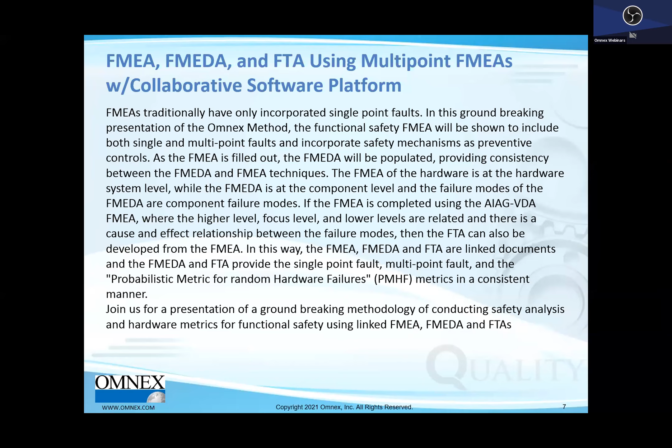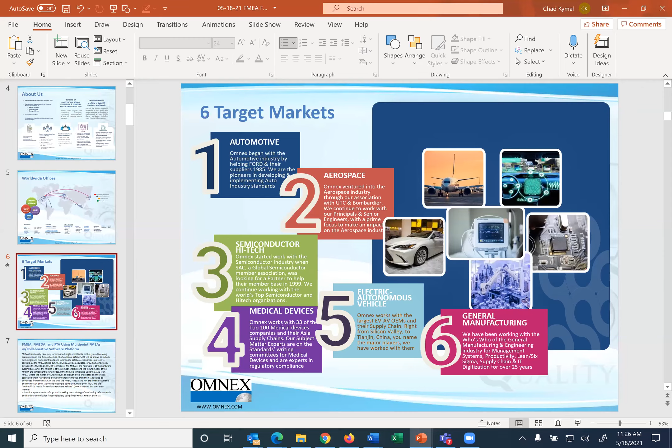If you can send me some sort of a link which is not forcing me to fill everything in, it would help a lot. All right, it's joined me finally. I'll join with video and I will turn it off, okay? Miles, do you want to try to share your slides, or you want me to run it? I think I'm in now. All right, folks. Hopefully I've not lost many of you and gave you all time to join in. Are you seeing my screen? Yes. All right. Folks, I typically don't sweat a lot when I do these webinars, but let's continue.

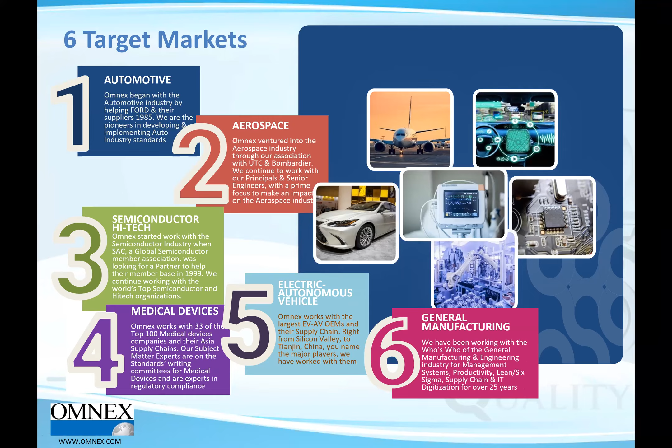So I was explaining how we are in 6 target markets, and you see here automotive. A couple of years ago, we realized the entire industry was going electric and then autonomous. Folks, if you don't know that now, you should know that now. I'm not going to explain all the reasons why, but definitely China deciding in 2035 and then GM deciding in 2035 they're going to be carbon neutral and completely electric is one of the big forces.

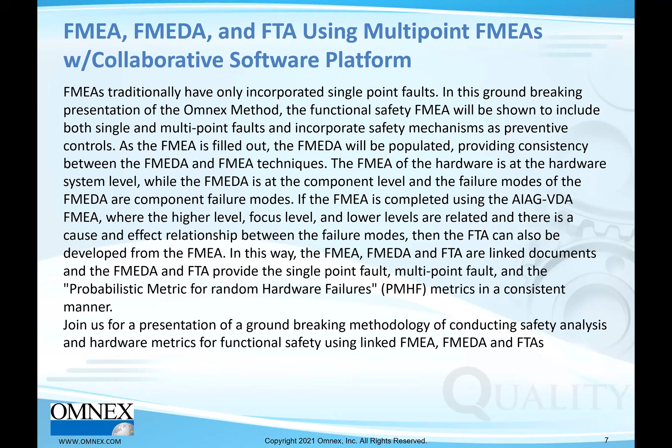With that said, just a little bit about me. I've been in the automotive industry, and we've now done a lot of work in semiconductors. I may have mentioned to you, I helped write the semiconductor supplement and I'm very involved in many different committees writing standards. With that, let's get to the agenda.

So here's what we're going to do. We'll talk about the 26262 safety analysis, because the 26262 functional safety analysis is what's driving this need for FMEDA and FTA. I'll explain that. Then talk about the DFMEA, the new DFMEA needed today, and how that helps in coming up with the FMEDA and the FTA. Then we'll talk about the linked FMEDA and linked FTA, and then we'll go to the summary.

Let's check here. All right. So first question, Miles, if you can ask the first question, I'd like to know why you're here so I can fine tune the delivery to help you, okay? This should be fairly easy to click. Let's not wait too long, Miles. We're going to do fine though.

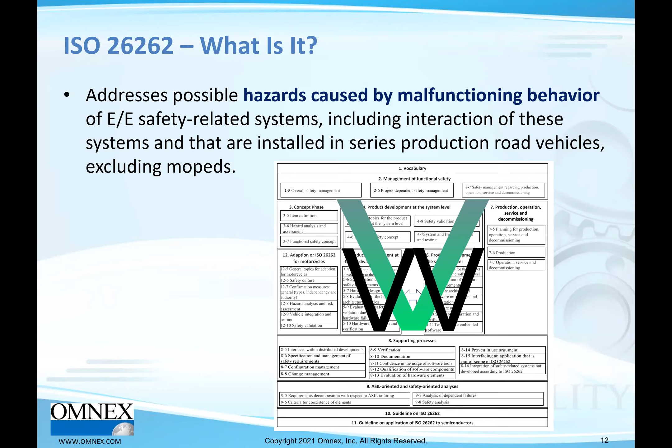So what can we say here? There's 12 parts actually. I think this is the latest one. So 12 parts, and you can see that the system level itself has a V running through hardware and software, and then small V's both for hardware and software. What's interesting to us is that the requirements between the system, hardware, and software are linked, okay? The standard calls it allocation.

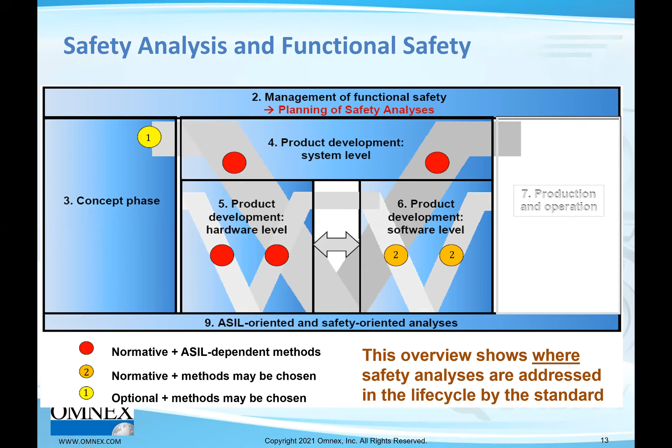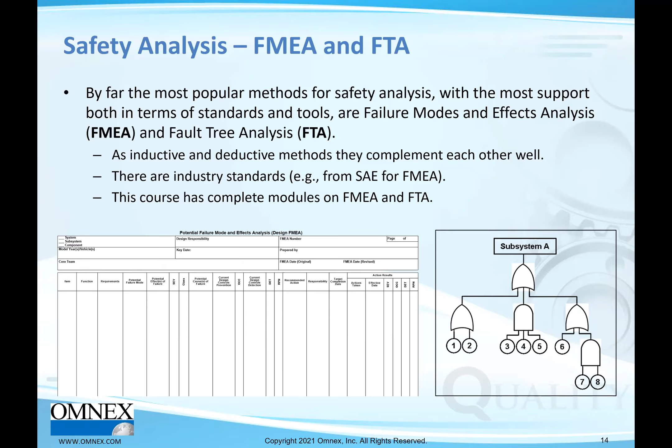But what's more interesting to us is that the safety analysis is being asked for in a couple of different places. At a system level, you need to do it at a product level, and they say both inductive and deductive, which is DFMEA and FTA. In the software area, they leave it up to you, but Omnex says, let's use a DFMEA, okay? So pretty much what's on the left-hand side is what we call the 4th edition DFMEA, and then we have the fault tree analysis here, and how do these two link together? That's the key question. That's the problem we have solved. But it's a little bit more than that. I'll tell you how we came upon this problem.

But before I go there, let me just say, not only do you have to do a DFMEA and the FTA, forget the software metrics right now, we also need to cover the hardware metrics, the 3 different hardware metrics.

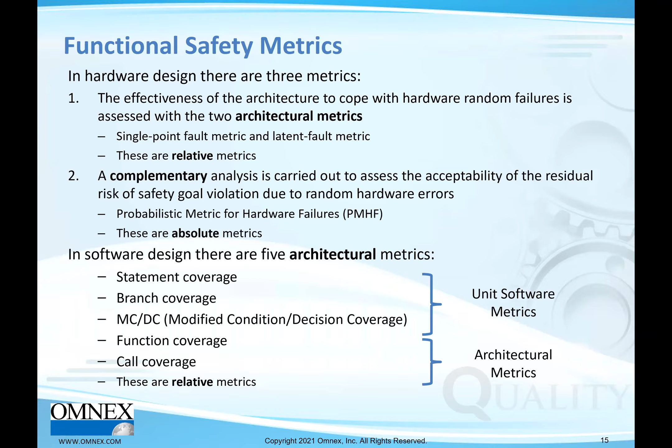One is called a single point fault, second is a multi-point fault, and then there's a probabilistic metric, the FIT rate, okay? Failure in time. So this is being calculated, and a lot of people use a FMEDA for it, okay? So a single point fault, a latent point fault, which is a multi-point fault, and probabilistic.

So here we are, been working in functional safety for the longest time, doing our assessments, and we find out that the DFMEA and fault tree analysis just don't correlate. And then we see the FMEDA, a third one that doesn't correlate. In fact, the FMEDA and the FTA need to be coming up with the same answers because both of them solve the single point fault, multi-point fault metric, and they're giving different answers. And so we asked the question, why?

And the answer was really that the DFMEAs we have today are only single point fault, which is a single cause. When you look at the failure, it is by a single cause. And what multi-point fault means is it's caused by A and B. A cannot cause it by itself and B cannot cause it by itself. When A and B come together, this failure happens. So that's the difference. That's why the DFMEA and the FMEDA and the FTA don't relate to each other.

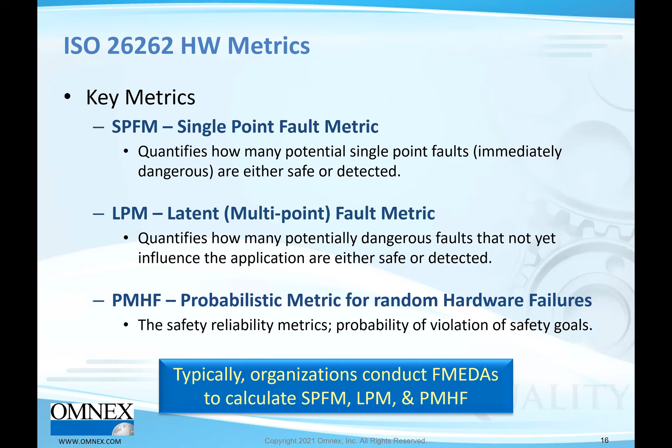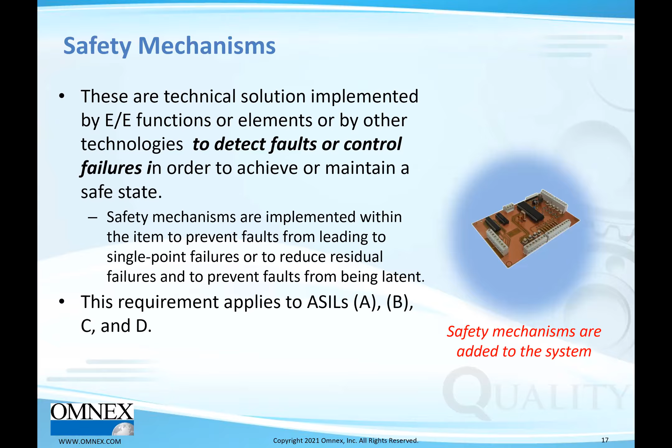So what we did at Omnex, maybe 2.5 years ago, our group, I mentioned that we had 3 of the writers of the core tools. We put our heads together and we asked the question what to do, and we created from there a DFMEA which is both single point fault and multi-point fault. I'll explain a little bit more. One of the things we also had to bring in was this idea of safety mechanisms. Safety mechanisms detect faults or control failures, nothing more than preventive techniques. And so we brought in the safety mechanisms into the multi-point fault.

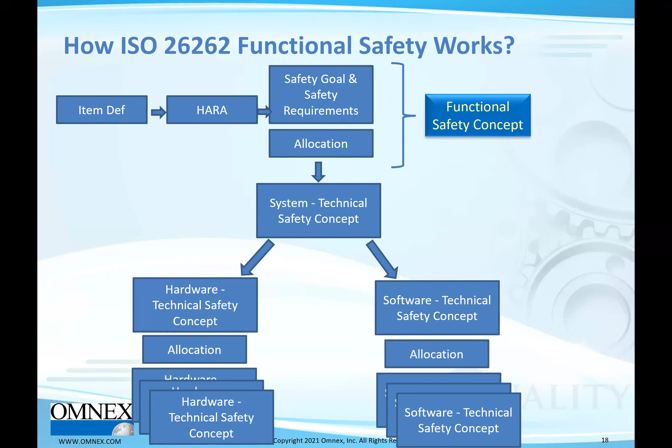So here's the flow. Here's the HARA. The HARA is nothing but the function's malfunction, okay? The safety goal is just a statement of this malfunction, and the safety goal populates the DFMEA. From there, the safety goal is allocated into the technical safety concept, which is system requirements, and then it's broken down into hardware requirements and software requirements. And hence, we call this a flow down at Omnex. Now, of course, this is also called structure in the AIAG-VDA DFMEA. But as you all know, the BOM or the structure, you could have a system, a subsystem, and even at a battery pack, it's more complicated. In fact, I have an example, so let me wait.

So let's move on. Let me ask you this question also. Do you work in the functional safety area? Yes or no? If no, do you work with one of the tools in this webinar? I just want to know how many people we have that deal with functional safety.

I feel like showing myself. I'll turn it off because I'm afraid it's more interesting. So you can see here, I don't usually sweat, but the little bit of lateness caused a little anxiety.

Okay, about a 50-50. Interesting. For the folks who said no, about half of you work with DFMEA. So 27%. About 80% of those who said no, so about 40% of the audience is working with these tools and interested in these tools.

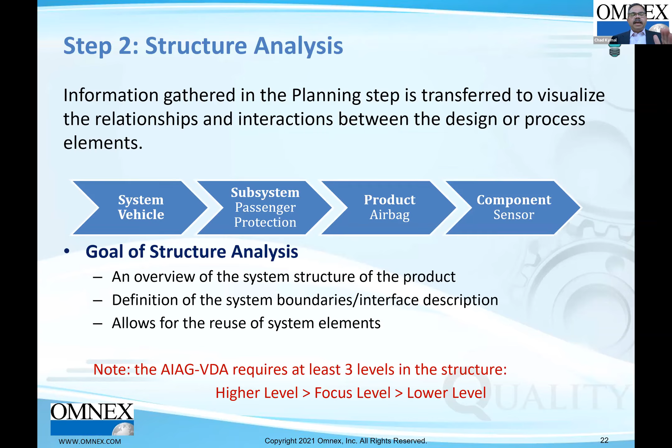So here is the idea of the structure. Well, this doesn't fully explain it. I have an example for a battery management system so you understand what the structure is. You've got to do the structure first. If you follow the Omnex method, you've got to follow the structure, and then you have to flow down functions and requirements like this. Here's the battery pack breaking down into 4 modules that break down further, and the BMS breaks down. So we're going to focus on the BMS. In my examples, and I'm going to show you some examples, it breaks into BMS hardware and BMS software, and the BMS hardware breaks down into the relay, fuse, et cetera, all right? So software is also important.

We'll flow down. Once you have the structure, you need to flow down. I don't have a picture of the functions and requirements. Yes, I do. This is just saying that, hey, you need to have traceability. And you're actually looking at our software, which has traceability up and down. Well, so I did not have the flow down. I'll actually show you a video that shows the flow down. Just keep in mind, you're looking at this structure and you're looking at the requirements as they flow down, all right?

The video seems to be working fine, I think. I'm going to continue with that. You can provide comments. I really appreciate all of you who gave me feedback when the system was not working well. I think you're able to keep up, and the internet is working fine right now, so I'll keep it on, all right? So here we have the structure.

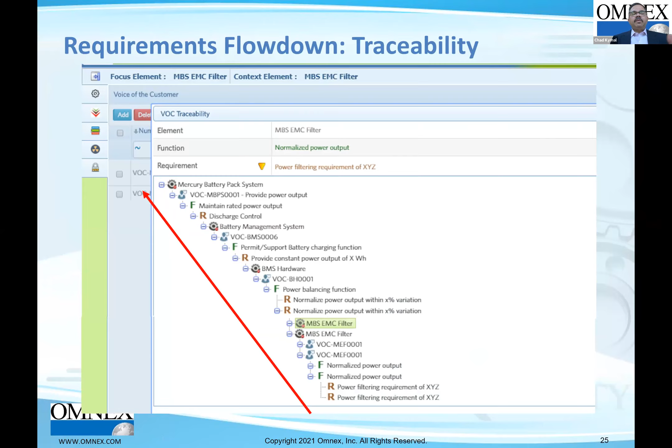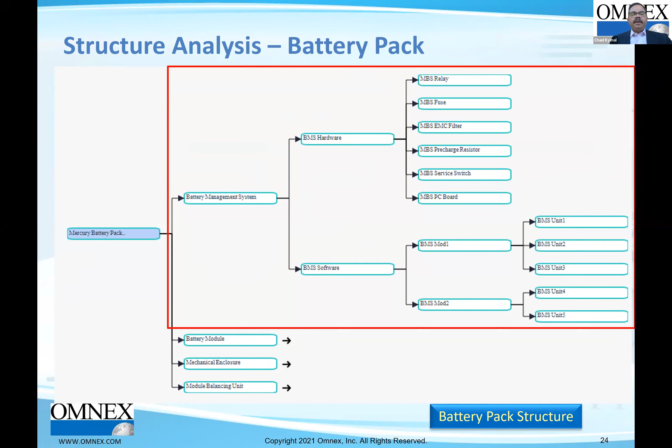By the way, this backwards and forwards traceability is very important, not only in ISO 26262, but for ASPICE for all the requirements. So when you go to ASPICE, it's not just for safety functions and requirements, it's for all functions and requirements. So when I talk about the multi-point FMEA, it's for all the requirements that were flowing down. As soon as you do the structure and the flow down, your DFMEA is automatically populated, okay? The left-hand side of your DFMEA is filled out.

And let me just... somebody says, oh, it keeps interrupting? Okay, I will turn this off. Thank you for letting me know.

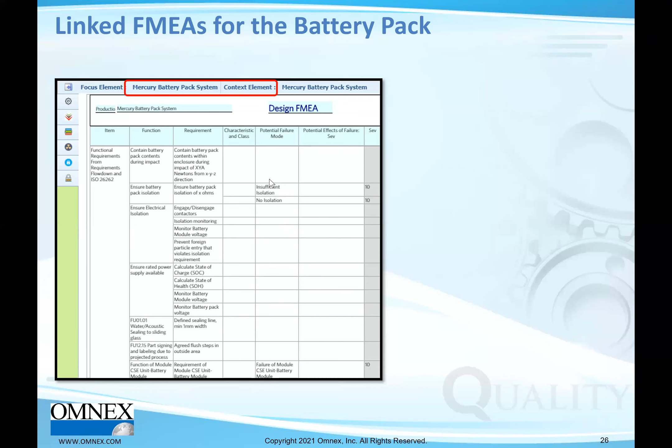So we have the DFMEA, and not only the system, the battery management system, all the modules, by the way, the subsystems fill in, but we're focusing on the BMS. For all of them, the left-hand side of the DFMEA is completed. Now you might be saying, what about AIAG-VDA? It's the same for the AIAG-VDA DFMEA, but I have more to say.

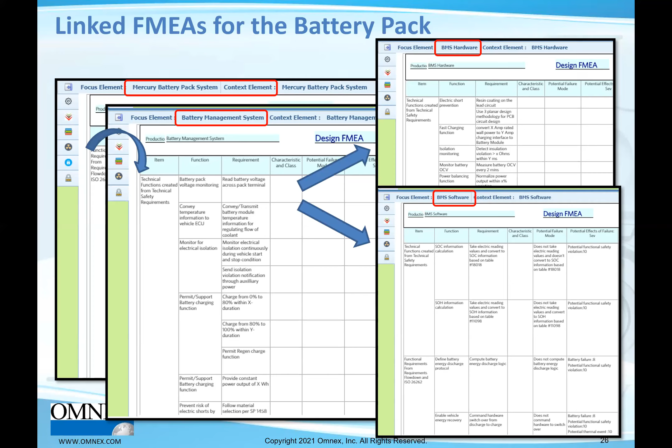Hold on. So when you're done with this linkage, you have a flow down from the safety goal into the DFMEA with both single and multi-point faults, and then going into the FTA, and this is supposed to be FMEDA, all right? I keep editing this to put the FMEDA on top. Oops, maybe not there. Here, FMEDA is here. So the DFMEA, the FTA, and the FMEDA are linked, and I'm going to explain that to you in the next chapter. Are we on time? We're doing okay on time.

So first, though, we need to have multi-point faults and single point faults, all right? And you need to have the safety mechanism. So once you put all that into the DFMEA, it needs to go into the FMEDA and the FTA. Once you populate the DFMEA, you get almost everything else.

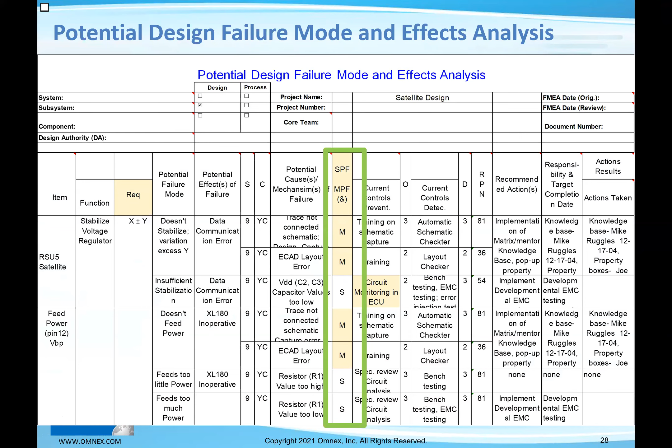Well, not quite, but almost, okay? So what do you need to do? Number one, create the structure, create the flow down of functions and requirements. That's called function analysis. Again, function analysis in the AIAG-VDA is between two items. What we do is we do the flow down between the entire structure, okay? Otherwise, you're not going to get the fault tree analysis.

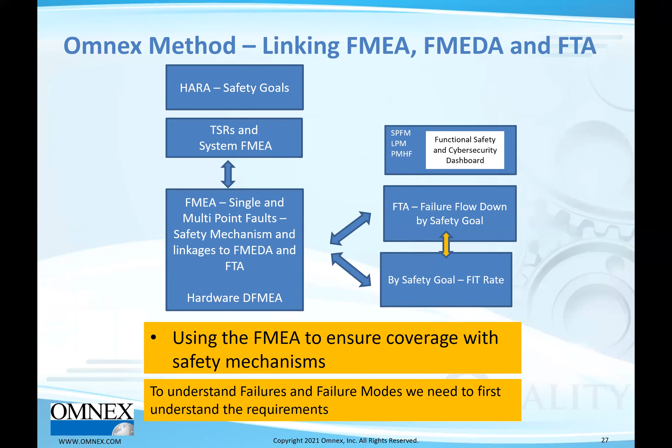And it incorporates single and multi-point faults, special characteristics, ASILs, incorporates safety mechanisms, and with the right dashboard, it provides you a chance to see. So what we mean by that, let me go back here. If you have a dashboard and it tells you what is your single point fault, latent point fault, and probabilistic metrics, you can go back and start playing with, what if I put a safety mechanism here? How does this change? And you can also see the propagation of the fault and decide where you want to put the control, okay? That's what we mean by this last bullet.

And what did we say? Creating an FMEA in this manner allows the team to create an FMEA in any format, all right? As soon as you create it, you can pull up the same information, whether in AIAG-VDA DFMEA or AIAG 4th edition. I'll show you that a little bit later. All right.

I have a great question. I have a great interest in multi-point DFMEA, yes or no? Wanted a little bit of exchange between us, so I added some of these questions just to see how we're doing, okay? All right, I think that's enough time, Miles. Okay, good. A good 84% of you are interested, and that makes me happy, all right?

Because, I have to tell you, I remember the day I almost cried in front of my class because I was teaching the same thing as a young man in the 1980s. And 15 years later, well, I'm a pretty old guy now. But I was in my 50s and I said, I've been doing this for like 15 years, and I'm saying the same thing over and over, and I'm not getting takers. Nobody's changing. Culture's not changing. And I guess we changed enough people that eventually it got right into IATF 16949.

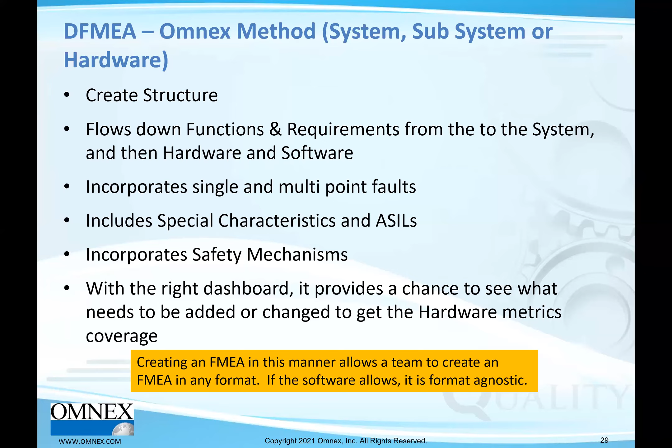All right, now that we have created this multi-point DFMEA following the rules, what rules? These rules, okay, which we call the Omnex method. Suddenly, this FMEDA that's created with great difficulty, keep in mind, let's say this is hardware, you have to have the failures at the component level, and it pulls up into the FMEDA, all right? Either you can create it right here in the FMEDA, or you can go create it in the component FMEAs, and it populates it. Our software, folks, does not create FIT rates. You have to put in your FIT rate estimates. Working with you, we want to put in the calculation so it automatically calculates it for you.

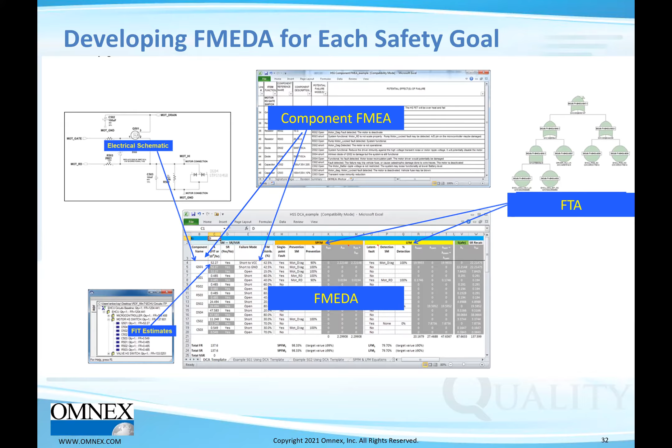And of course, the FTA, you put it in one place, it populates. You don't have to do all three tools. You can either fill out the DFMEA and the FTA, or you can do the FMEDA and the DFMEA and the FTA comes along for free. It's filled out automatically, okay? Just like when you fill out a PFMEA, half of the process flow control plan fields are filled out. And when you fill out the PFMEA and the process flow, half the control plan is filled out, okay? But there's almost 100% fillage between some of these other tools.

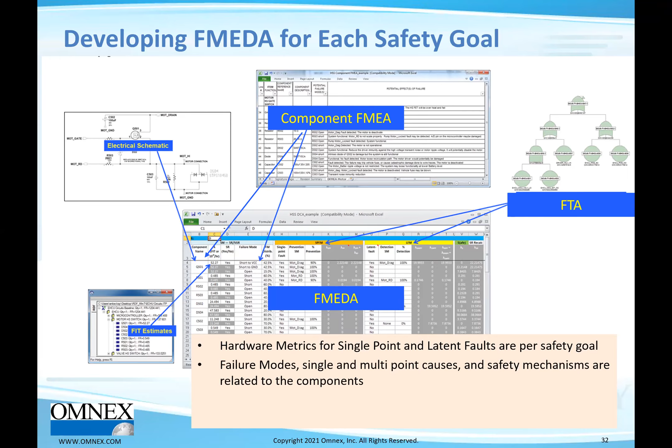All right, so hardware metrics for single point and latent point faults in the FMEDA are by safety goal. Keep that in mind. Failure modes, single and multi-point causes, and safety mechanisms are related to components that automatically populate when you fill out the component DFMEA.

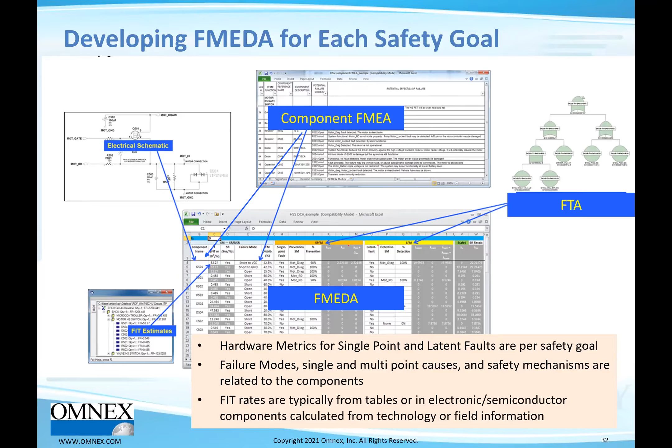FIT rates are typically calculated from tables for electronic semiconductor components; we have the standards, and in the next few months we'll be trying to automatically, as soon as you say you have this component, pull in the FIT rate. So you fill it in and the FMEDA automatically goes in.

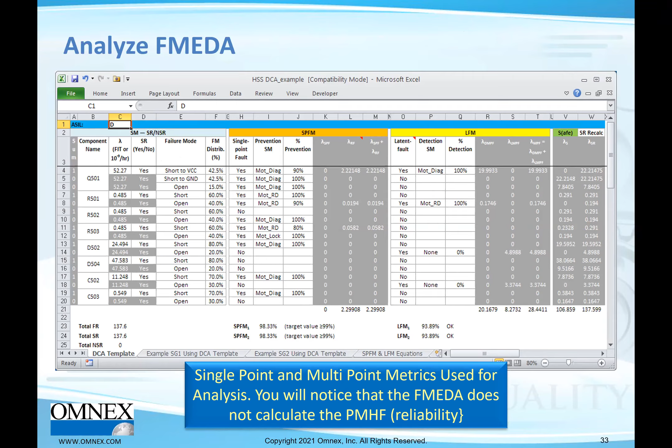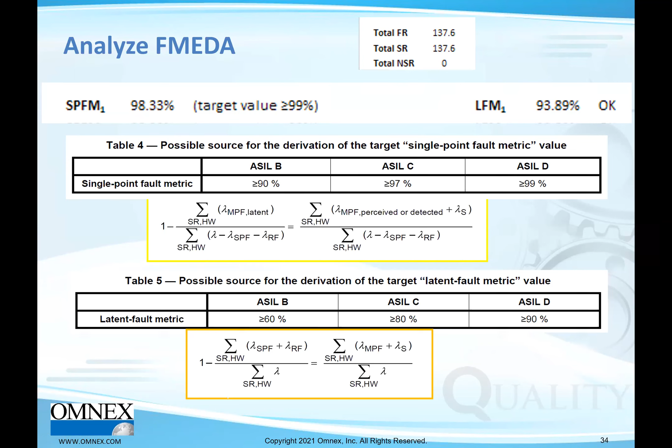And once you do that, just keep in mind, the higher the ASIL, the higher the single point fault target and the multi-point fault target. And when you get to ASIL D, why people don't want ASIL D is because you may almost have to go into redundancy in your design. What more can I say? Of course, you use decomposition, and you decompose the D, and it's allowed. It's just mathematics, and that's the way you do it. But you have to make sure you have a DFA, independence.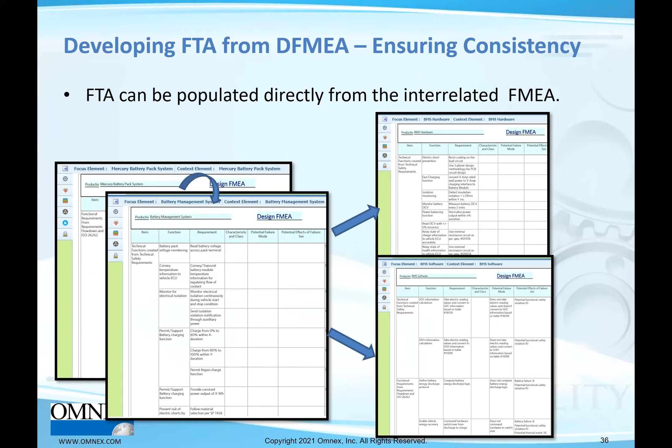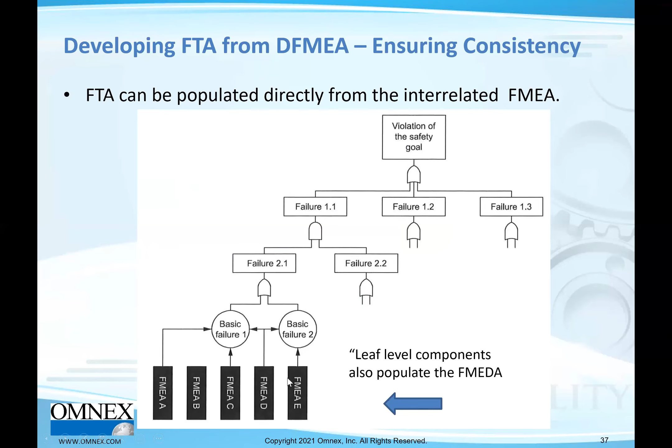Now we move on to the linked fault tree analysis. Just reminding you, what happens in the FTA is that as soon as you come up with system functions and requirements, the subsystem, in this case the battery management system, and then the hardware and software, you actually have a propagating function and requirement. By the single point or multi-point, you have the AND or the OR gates, so you automatically get your fault tree analysis. And the leaf level components are what's used in the FMEDA.

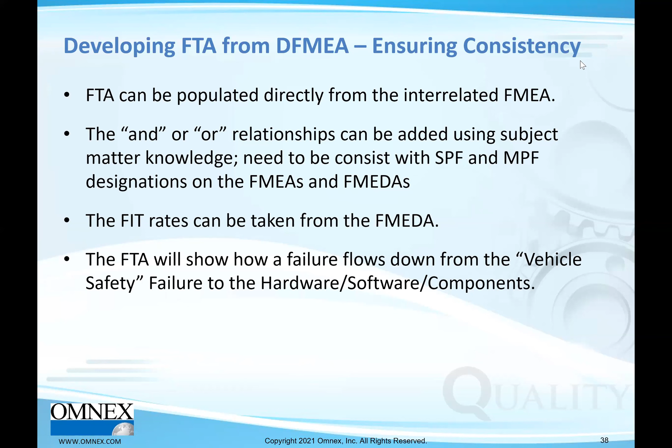So what do we say here? The FTA can be populated directly from the interrelated DFMEAs. The AND or OR relationships can be added, but actually it's there. You don't have to add it. It's added because with a single point fault or multi-point fault, you get the AND or OR. And they need to be consistent with the SPF and MPF designations on the FMEAs and FMEDAs. Fit rates can be taken from the FMEDA. I'm going to talk about this picture, why it's there, and why it's important.

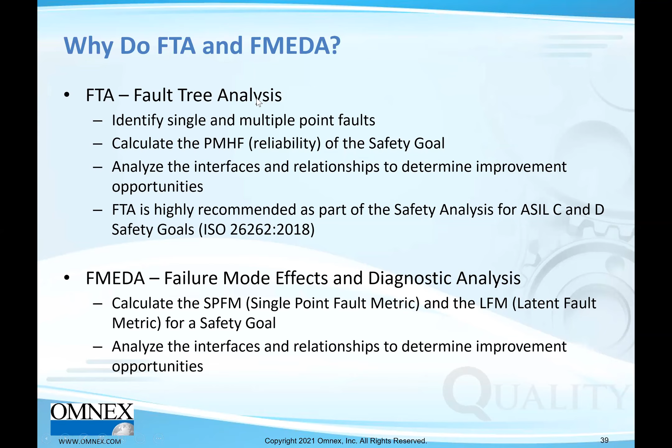We don't quite have this picture in our software, but we do have the fault tree analysis. You can look at the propagation and pull up one failure at a time or one safety goal at a time. Remember, this is for both safety and non-safety. I don't believe we have added the controls yet, but we could easily add them. You could query the system and decide where you want to put your preventive measure, safety mechanism, or control, because it may be cheaper at a lower location than a higher one, to prevent this failure from propagating up.

Okay. And I see some questions already. Why don't I give you some chance to ask more questions? I may pause here for 30 seconds. And we're quite on time. I usually do this with one or two others, and there's a little bit of lag as I pass the baton to somebody else to speak. What kind of questions do you have?

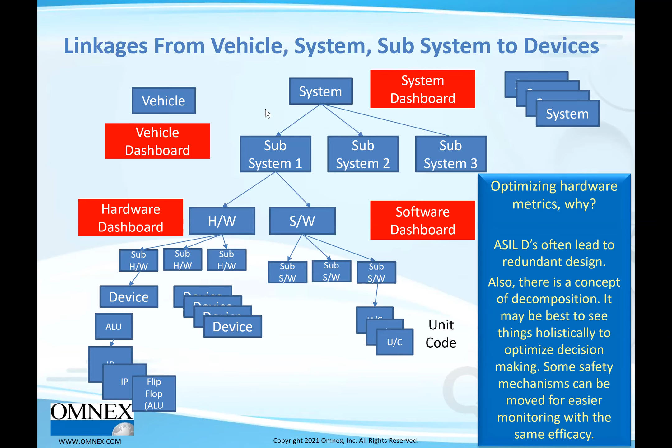What I'm going to do now is actually show a little bit of the software. All set up here, and maybe not. As I went away, I think I lost it. It went into the Omnex website. I'm just going to stop sharing for a second and pull it up. Bear with me one second here. I want to show you both the VDA DFMEA and the 4th edition DFMEA. All right, so one of the FMEAs is pulled up.

So here we're taking you through it; it's going to be a little bit more than 4 minutes. This is our requirements management page. You bring in the stakeholder requirements on the left-hand side, not populated very well here. Then you turn that into functions and requirements, and then you allocate it. So let's start here with the top level requirements.

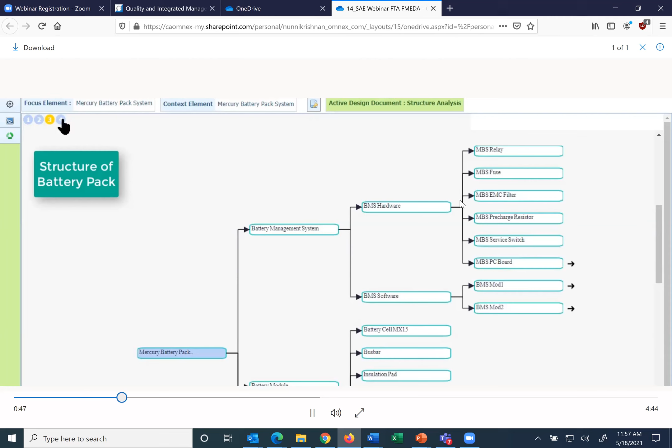So when you click at the top 1, 2, 3, 4, you actually will see the battery pack go into the battery management system, battery module, mechanical enclosure, and then the BMS opens up to its parts. And this is the picture we took a snapshot of to show you. But also we are interested in the software. Okay, software also goes into modules and then to unit code.

All right, now what we're showing you is a different way to look at these requirements. We call this flow down. You can take any requirement from the battery pack and then click the arrow and open it up. And you'll see that function and requirement, maintain rated power output, breaks into four functions in the battery management system. And if I click permit/support battery charging, I find out it's a power balancing function in the hardware, and it's done by the EMC filter. Okay, there's a one-on-one relationship as it flows down.

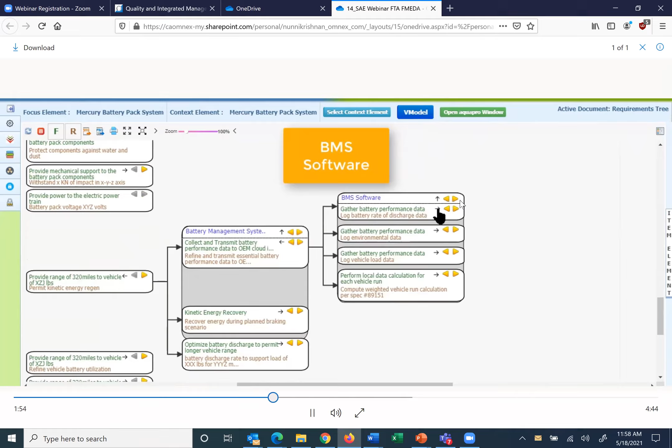Now I'm going to look at this: provide range of 320 miles, breaks into three different requirements, and I click collect and transmit battery performance data. It goes into software. Okay, that's how we do it in software. And it says gather battery performance data, and it breaks down into modules and then finally into unit code.

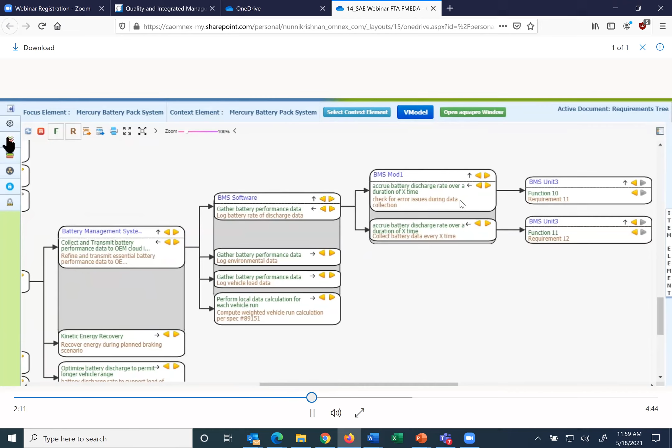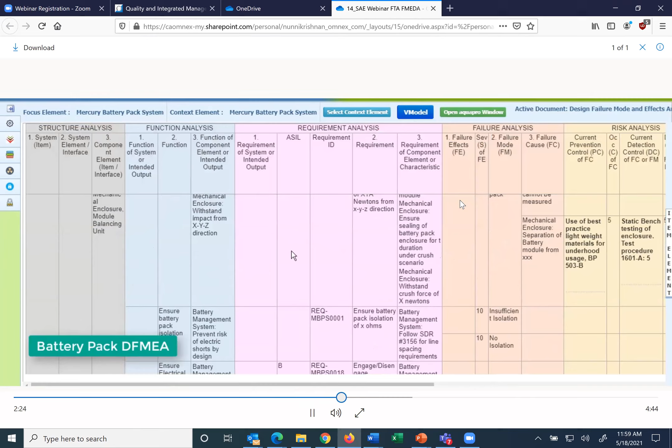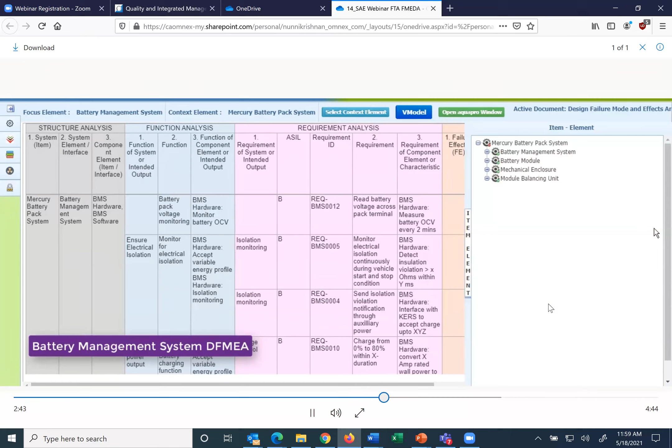All right. So just to say how this function analysis is by the entire structure, as soon as I do it, I can pull up the DFMEA, and I'm going to be pulling up the AIAG-VDA DFMEA, and that's for the battery pack. And really the takeaway we want from you is that once you have the necessary information, it doesn't matter what format you're using. And if you're more comfortable using one format, do it with that format.

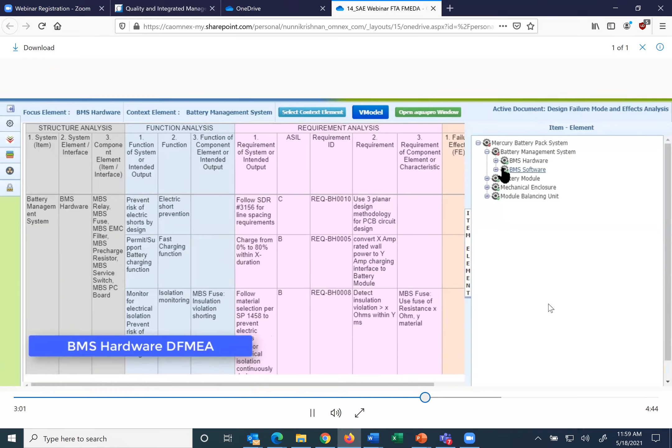And today we have the SAE-J1739. Two of our FMEA experts were on the writing committee for that. In fact, we're teaching today a multipoint DFMEA with 4th edition in SAE-J1739. All right, and we're teaching an FMEA in the 4th edition that automatically you can pull up if you use Omnex's software. You can pull it up in the AIAG-VDA FMEA.

All right, so BMS, this is a hardware DFMEA. Remember, we have been doing what is called algorithm DFMEAs for the longest time for General Motors in Omnex's history. We did it at the Proving Grounds. And just showing on the right-hand side is the structure. You can click on the right-hand side and it pulls up, so we click the battery pack. We're coming back to the battery pack.

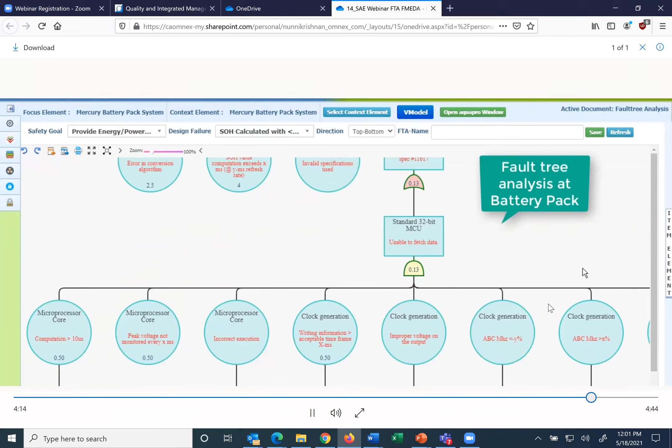Now we're going into the FMEDA. By the way, they went and picked it from the menu. I cut it out for time. So actually, this is the fault tree, not the FMEDA. And you can see then the flow down of the malfunction that's in a safety goal all the way down, okay? We also did a semiconductor one for one of our customers. We added that semiconductor one that feeds into the circuit board, okay?

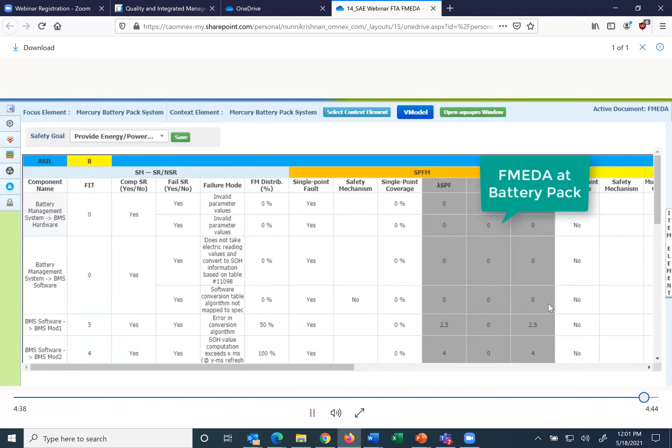And the big part of our software is what is called reuse built in, so that once you have created it, for the next version of it, now we're picking the FMEDA, and as soon as you select the safety goal, you will see that it's been populated all the way down to the single point fault and multi-point fault metric, okay? All right, and let's see, that's it.

Now, I did want to very quickly show you also the same for the 4th edition. Let's see if I can quickly pull that up. There it is. Let me display, share my screen.

So it's the very same, and I'm just going to jump right to somewhere. So the very same requirements, the same information is being pulled in, as you can see here. Let me just go back a little bit. So, well, the same information is pulled into the 4th edition, okay? As you can imagine. So we are format agnostic because it's a database and you can pull the information. This has been one of our strengths even in the 80s and early 90s, is that you can have multiple formats, including Honda format, from the same database, okay? All right, that's what I wanted to share.

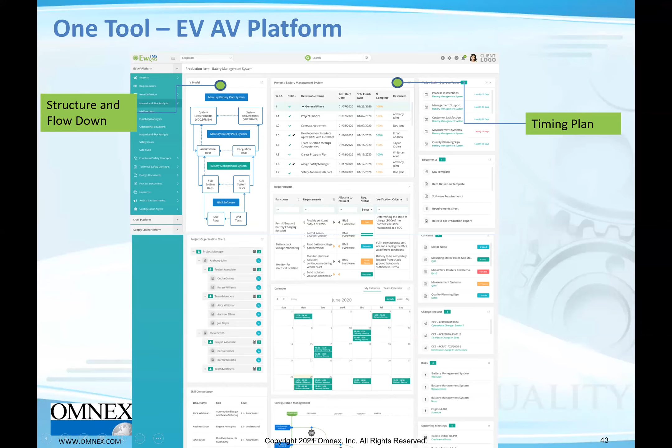And the design supply chain, so you see the structure, this is actually the battery management system. You click anywhere in the structure, it shows you the project plan or the timing plan, and you're able to pull up the functional safety plan, cybersecurity plan, SOTIF plan, or the project plan. The requirements change. You get the project team. You get the configuration plan. So, of course, the requirements are all linked. So you're seeing linked requirements.

And the idea is, as you all know, when you look at your structure, your semiconductor supplier, well, you may not be directly dealing with them, but they're all part of your supply chain, and you can allow them to come into the same platform so the information is there.

Our goal was a scorecard. Of course, we've had this suite for a while, 100% for IATF. A-SPICE, we're at 90%. We're not planning to do the other 10% purposely, and 95% for safety. And we're at 68% today for cybersecurity, ISO 21434. Within the next few months, I think the plan is around 95% also for cybersecurity.

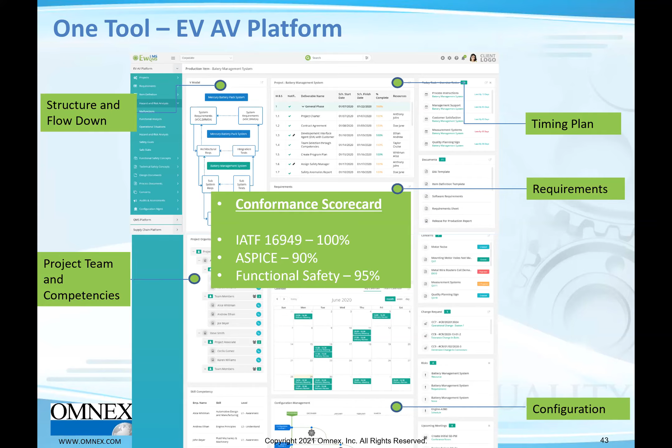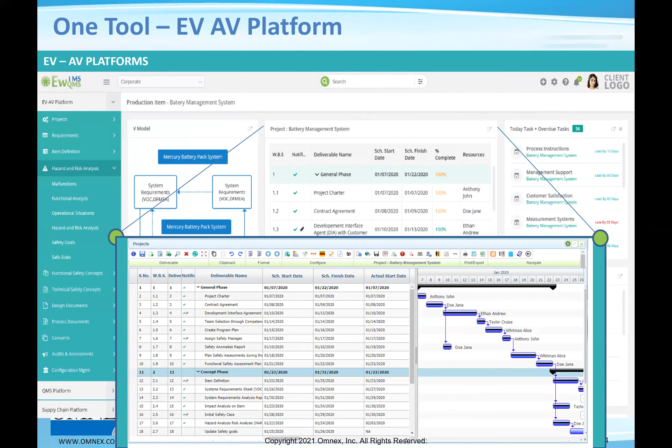All right. So it's a quick look at how the tool is. You click here, and you can just work with the project plan. Of course, there's many. It's a very complete tool. You have the requirements. You have the organizational chart. You know who's on the project team, and you can customize it with your own widgets. Okay.

So here, this is my calendar. Let's see here. Let's move on here.

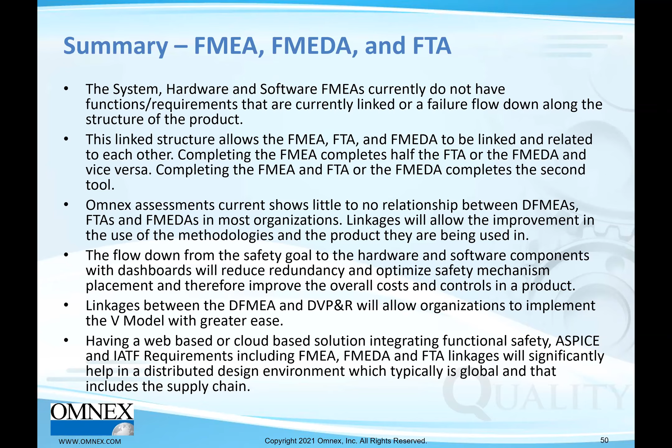So the linkage between the DFMEA and the DVP&R, I did not talk about this. I didn't feel I had time and I didn't want to bring in so many thoughts here, but very important for Omnex is this link between DFMEA and the test plan, DVP&R. If you do that, you actually will get the V model. If you're interested in that, I'll be happy to talk to you about that. Of course, having a web-based or cloud-based solution integrating functional safety, ASPICE, and IATF will significantly help in this design supply chain.